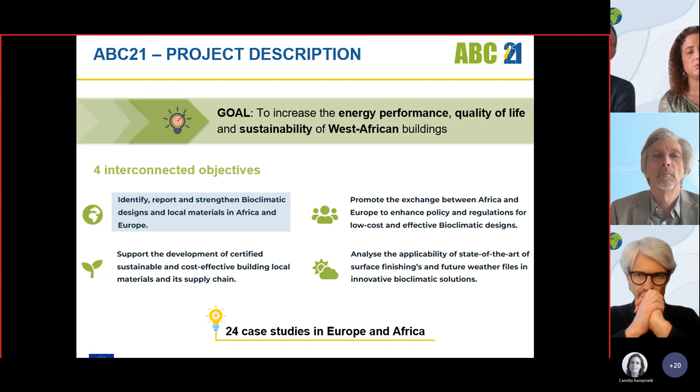To reach this objective, we have identified 24 case studies in Europe and Africa, including La Réunion, which is a remote French island in the Indian Ocean on the east coast of the big island of Madagascar that you all know.

So all these case studies have been selected. First of all, we wanted to prove to public and private sector and also to policymakers that bioclimatic buildings can be comfortable and affordable. Most of the time, people think that bioclimatic buildings cost more money than a standard building, and we try with this project to prove that this is not the case.

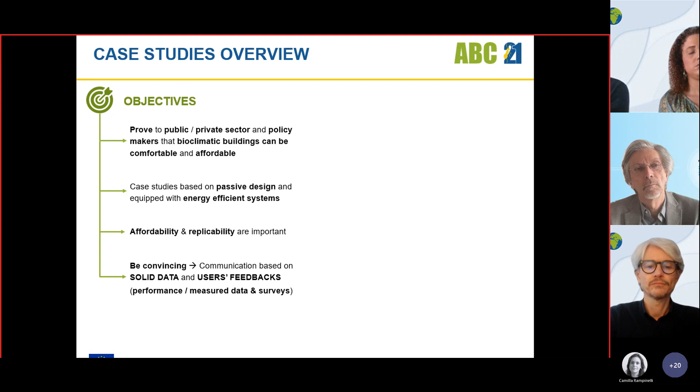The case studies have been identified thanks to their passive strategies, and they must have energy efficient systems as well. Affordability and replicability are two important criteria, and we have to have solid data and users' feedback to be convincing. We have to prove that those buildings are bioclimatic, comfortable, and that the users are happy to live and work in this kind of buildings. That means we need measured data and surveys to get this feedback.

In terms of location, we have selected 5 case studies in Europe, 13 in Africa, and 6 in the island of La Réunion. What we realized is that when we looked for case studies in Africa, there is a lack of data there. So in terms of improvement and gain in this project, thanks to this project, we will be able to have feedback and measured data in most of the African case studies that we have selected. That means we have launched measurement campaigns that started a few months ago.

So in terms of thermal comfort - just a few words, because the main purpose of this webinar is to analyze these buildings in terms of bioclimatic design, but also thermal comfort conditions. Thermal comfort is defined as that condition of mind which expresses satisfaction with the thermal environment.

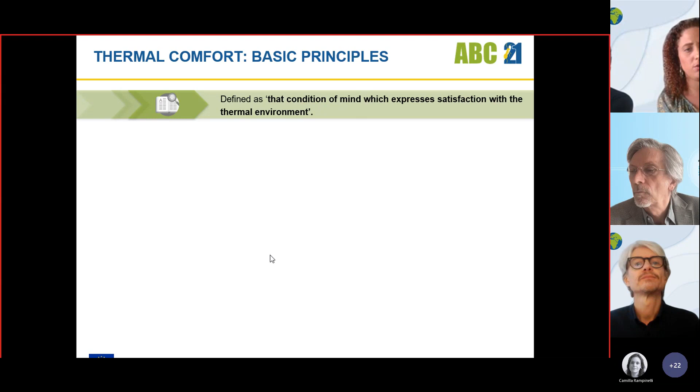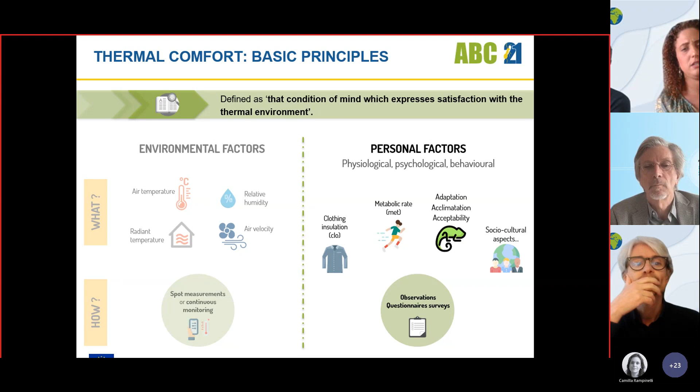Comfort is generally based on different environmental factors, such as air temperature, radiant temperature, relative humidity, and air velocity, which we can measure thanks to spot measurements or continuous monitoring. But thermal comfort is also based on personal factors that can be physiological, psychological, or other aspects. The most important are clothing insulation and metabolic rate, but there are also phenomena that have been studied, like adaptation and acceptability. These aspects are generally studied thanks to questionnaire surveys.

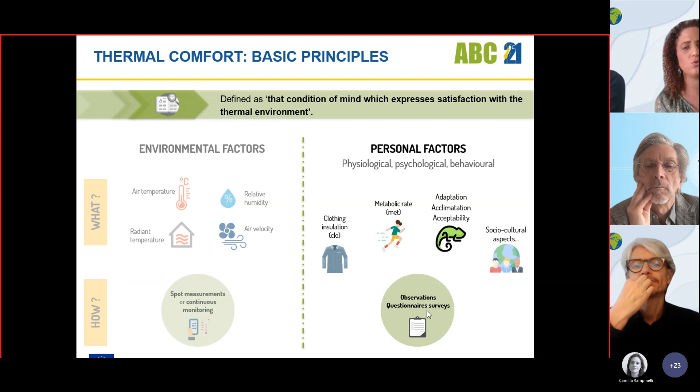So to reach thermal comfort in hot climates, air velocity is very important. In terms of natural ventilation, in all the buildings in Europe and all over the world, we can identify 3 different kinds of ventilation. The first one is used in air-conditioned buildings, just for hygienic purposes, and so the level of air change rate per hour is just 1.

The second type of natural ventilation is used to evacuate the internal loads. In that case, we need to have 10 air changes per hour. And the one which is more important, if we want to create air velocity on the users, is the one delimited by this rectangle. The aim is to create an indoor air velocity of 1 meter per second on the users. In that case, we need a very high air change rate per hour.

60 is the minimum. In terms of thermal comfort, the comfort zone is the blue zone, and it's defined and can be influenced by the air velocity, which is on the x-axis of the diagram, and the air temperature. As you can see, the more important the air velocity on the user, the more you can feel comfortable at high temperature. For instance, with an air velocity of 1 meter per second, the user, if the clothing is appropriate, can feel comfortable up to temperatures like 30 degrees.

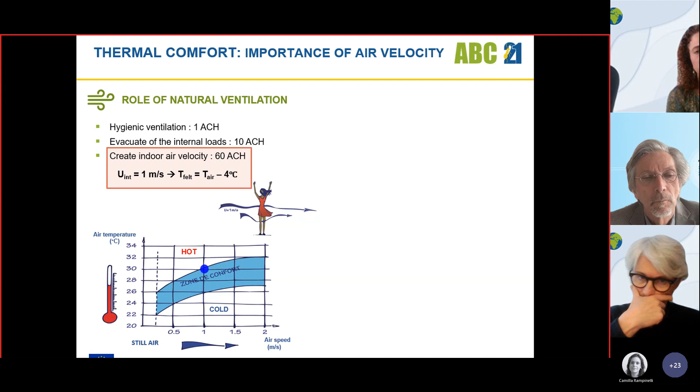This air velocity is generated by a difference of pressure between the two facades of the building. That means we need narrow buildings so that we can use natural cross ventilation.

In case we have no wind, ceiling fans have a crucial role because they can create air velocity, and the feeling temperature can be reduced by 4 degrees. For instance, if a user has an air velocity of 1 meter per second and the temperature is 30 degrees, the temperature the user feels is 30 minus 4, which is 26 degrees. So he can feel very comfortable.

So ceiling fans can play a very important role, and air conditioning can be replaced by ceiling fans.

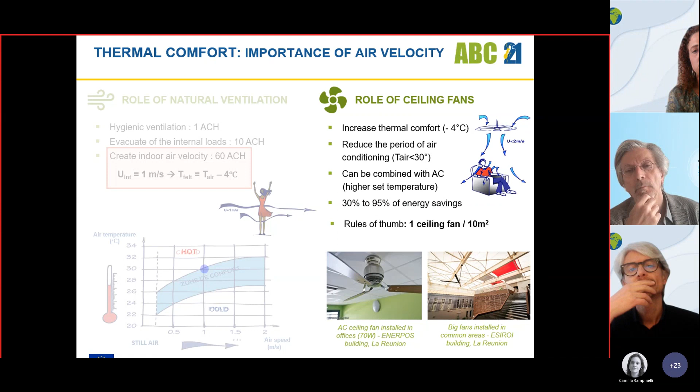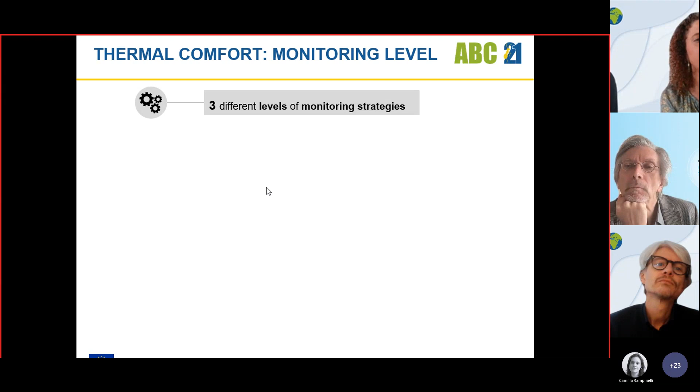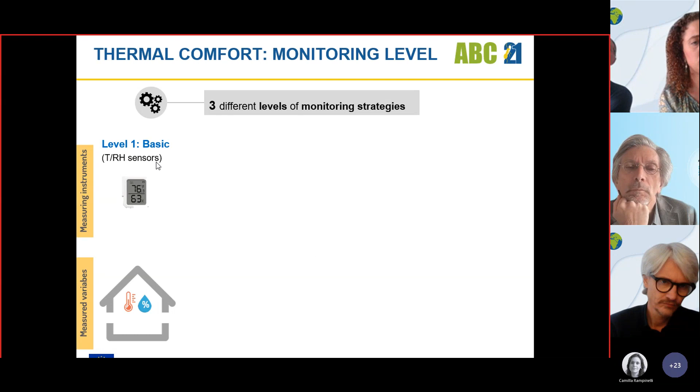So to measure and study thermal comfort in the different buildings, we define 3 different levels of monitoring. The first is a basic level, where we only put temperature and relative humidity sensors inside the room. Level 2 is the intermediate level.

We add a weather station outside. So inside the room we still have the smart sensors for temperature and relative humidity, and outside the building we install a weather station.

And the next level, the detailed level, is like the first 2 levels - we have air temperature inside and the weather station outside for the different physical variables - but we also have measurement of air velocity and globe temperature inside the building. So the inside monitoring is more detailed.

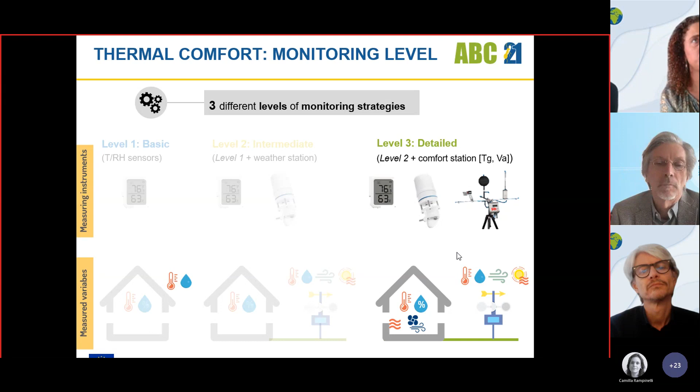Here we have the different levels for all the 24 case studies we have selected. Just to show you, we only have 4 buildings with the basic level, and for most of the buildings we tried to have the detailed level, especially for the African buildings, where most of them are in level 3, so we have detailed monitoring.

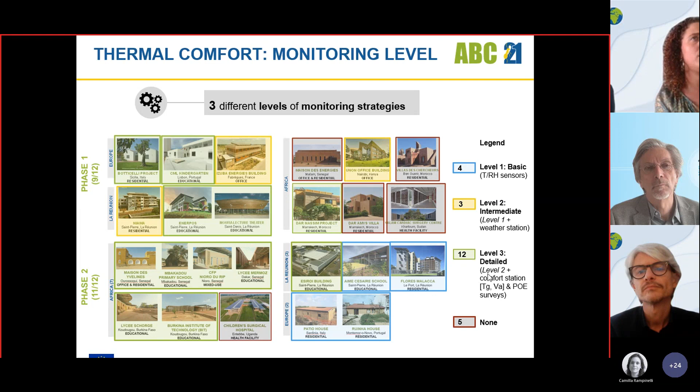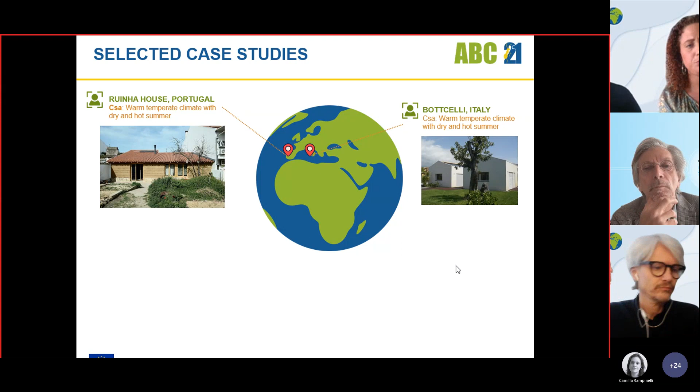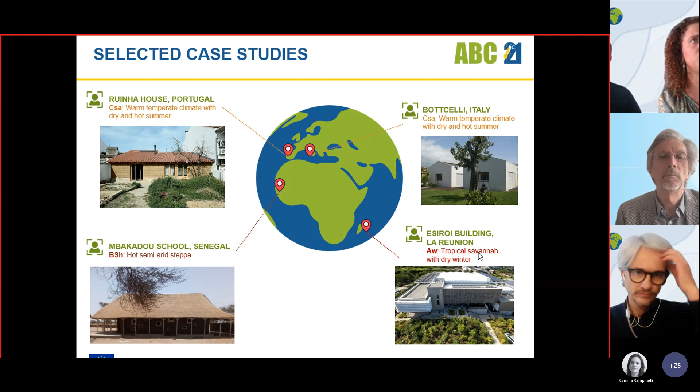So now we are going to focus this webinar on 4 case studies that we have selected. Alessio and Lorenzo are going to present the 2 case studies in Europe: the Ruinha house in Portugal and also Botticelli in Italy. Then I will follow with the Mbakadou School in Senegal. And finally François will present the Esiroi building in La Réunion. So now I leave the floor to Lorenzo and Alessio.

Thanks. So here is a presentation from Lorenzo Pagliano, Silvia Erba, who is also coordinating with me the entire project, and Alessio Battistella. The first case study is this single family house located in Sicily.

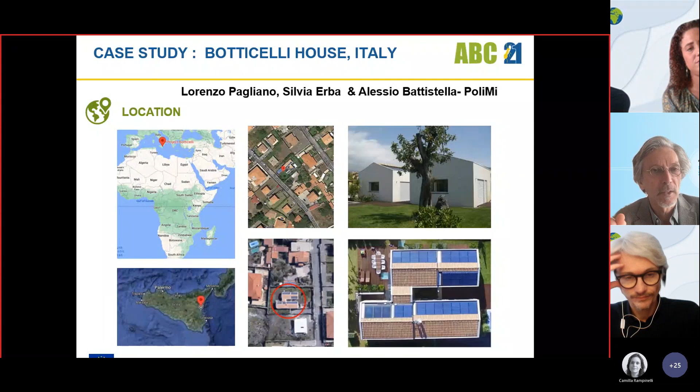The building has passive features, one of which is quite important: the external insulation of the envelope. This house is certified passive house and Casa Clima. It has 20 centimeters of external insulation, high performance windows, and other passive features like natural ventilation, especially at night during summer, and an earth-air exchanger where ventilation air is pre-cooled through the ground.

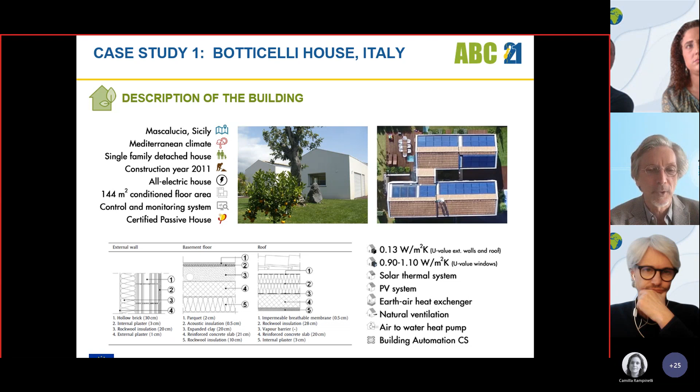Protection from solar radiation is given for the opaque walls by the external insulation and the thermal mass of the structure. There is also protection from direct radiation through automatic controls on external blinds, and the ground exchanger helps as well.

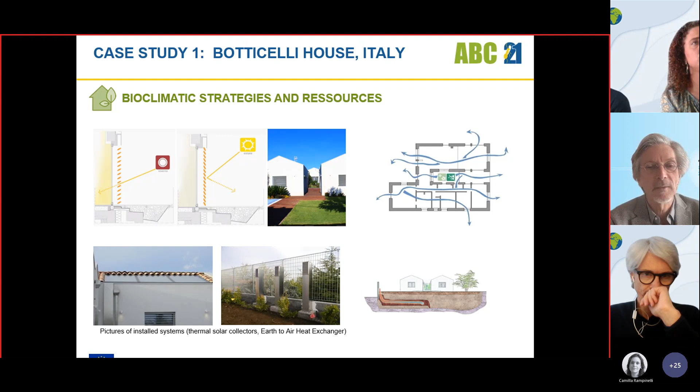We have a very detailed monitoring system here for air temperature, globe temperature, humidity, air velocity, indoor air quality, and also measurements of visual comfort, at least the luminance.

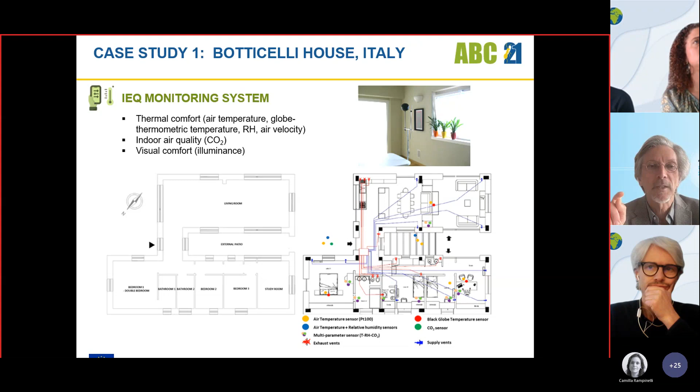In this building, since we have 3-4 years of monitoring, we also have complete monitoring of the energy uses for each equipment in the house, and the energy generated by the photovoltaic panels on the roof. Since energy use is so low thanks to the passive features, the building actually generates more energy over a year than it uses.

But if we look month by month, there is still an imbalance between what is generated on the roof in December and what is used in December. So it's not a net zero energy building. If we do the balance over a year, which isn't very realistic, it works out, but month by month it's close to zero because of the high reduction of energy use thanks to passive features.

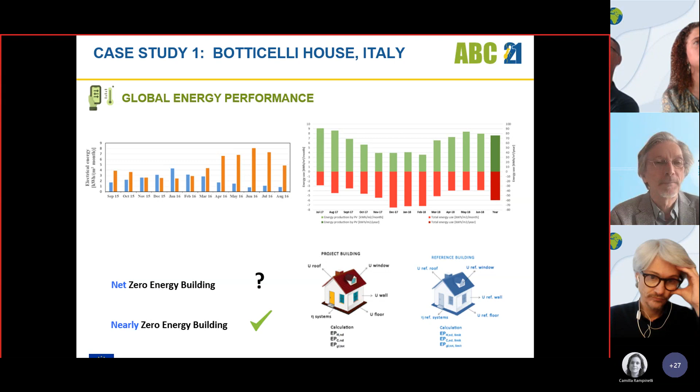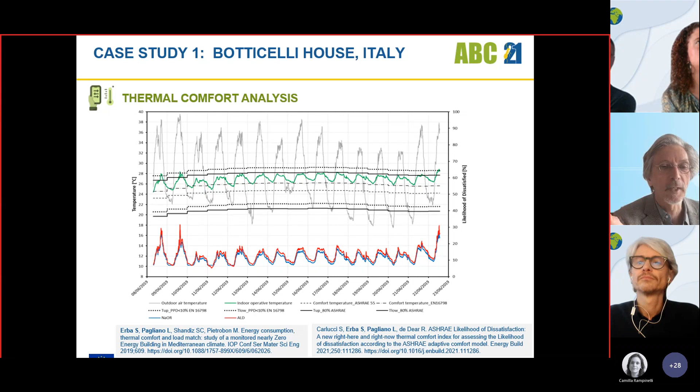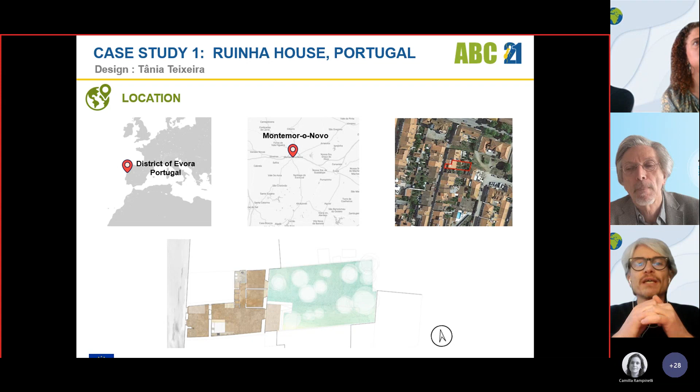In this case, we decided to present a case study located in a historical center, where the buildings form a kind of dense system. The idea is to understand how we can compare these kinds of materials while maintaining techniques that come from tradition.

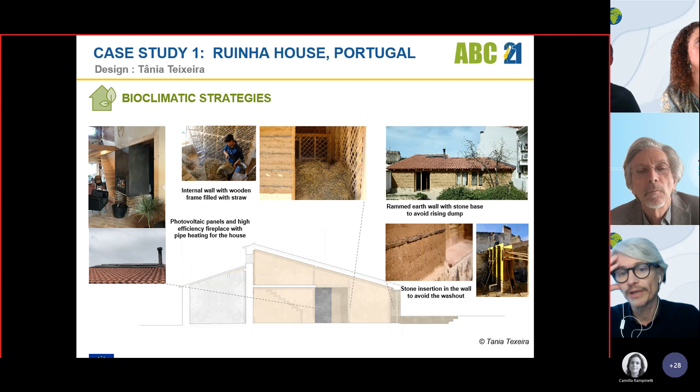We are about 40 minutes driving from Lisbon, quite near Évora. This house is made with rammed earth, using the pisé technique, which they pushed forward and maintained as the facade. There is no plastering, just to demonstrate that we can do it, with a little architectural solution such as layering stone that avoids the washout of the wall.

The internal walls were made with straw and earth. The straw is a waste product from agriculture, so there's a strong idea of circularity in this building, along with the photovoltaic system.

In winter, the photovoltaic system can give energy to a heating system, and when there is no sun, they use a kind of high-performance oven or chimney. There is no air conditioning, and with just thermal inertia, this very interesting solution manages to maintain a quite comfortable situation.

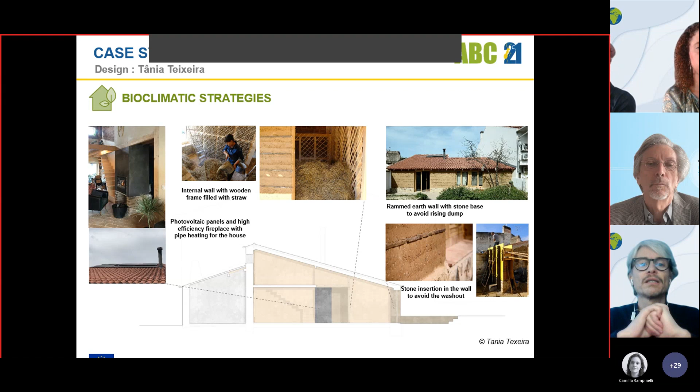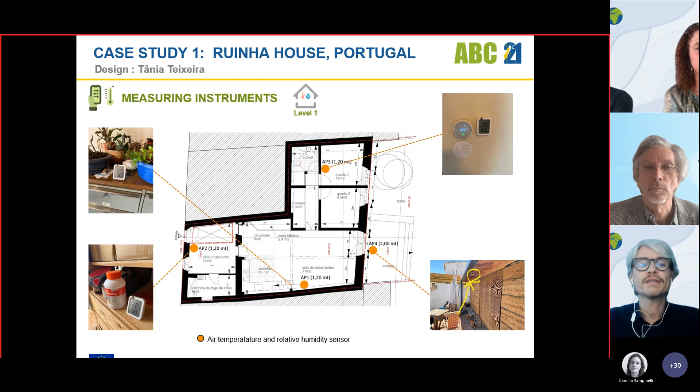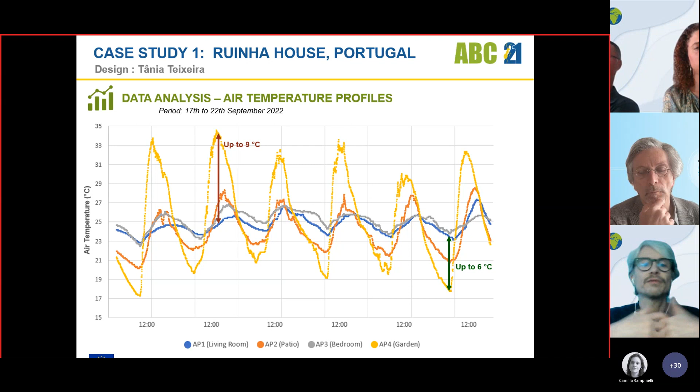Here you can see there is a quite interesting gap between external and internal, and night and day. So just with night ventilation, we can get quite interesting values again in terms of natural ventilation.

I leave the floor to Virginie. Thank you, Alessio. So now I'm going to present the Mbakadu School in Senegal, which was designed by ASF Italia.

The building is located in the region of Louga in Senegal. We can see on the picture that there are only some shrubs and not a lot of buildings. The Mbakadu School is composed of 3 buildings. The first one was built before the project, in cement. For the 2 other buildings, I'm going to present the bioclimatic principles.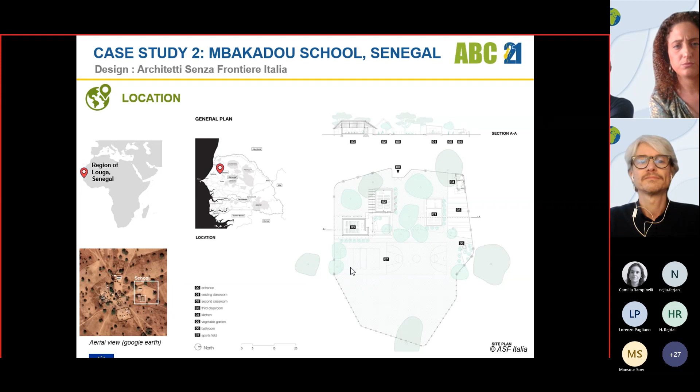Here we have the different bioclimatic strategies implemented in this building. The asset of the building and the strong points we can retain is that they worked on the high thermal mass of the walls and roof, thought about solar shading with large roof overhangs, and used local materials.

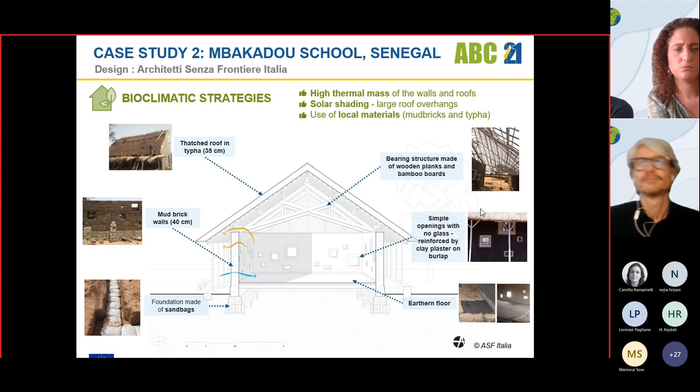You can see that the foundations of the building were made with sandbags. The walls are made of mud bricks that are really thick, 40 centimeters. The roof is a traditional thatched roof in typha, also very thick, at 35 centimeters. All the structure of the roof is made of wood and local bamboo. Also, the particularity of this building is that it has simple small openings with no glass, and the floor is made of earth.

For these buildings, we are at level 2 of the monitoring strategy. Here we can see the position of the temperature and relative humidity sensors in the different buildings. The sensors meter 1 and meter 2 are placed in the buildings described before, in mud brick and typha, and the third one was in the building made of cement. We can also see the position of the local weather station that the team on site installed for the project, which comes from the TAHMO project.

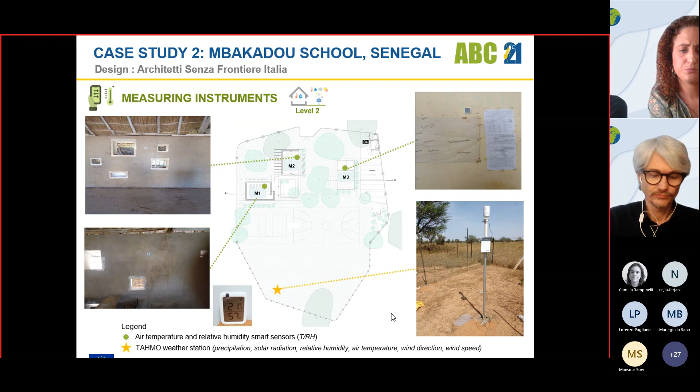Here we have an analysis of the data exported from the temperature and relative humidity sensors in terms of the Givoni comfort zone. We focused only on meter 1, since the 2 classrooms had approximately the same results. In the Givoni diagram, comparing the results for temperature and relative humidity inside and outside, we see there is less dispersion of the points inside the building.

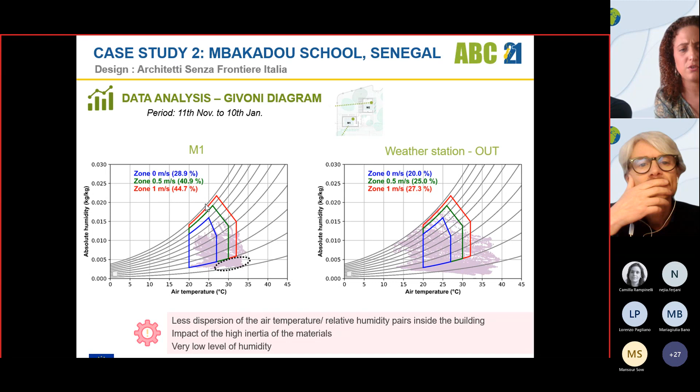Here we can see the impact of the high inertia of the materials. Also, most of the time the points are outside the comfort zones, but that's because of the low level of humidity. For these conditions, if we can achieve an air velocity inside of 1 meter per second, we will have only 45% of the points in the comfort zones.

We then tried to analyze the data in terms of air temperature profiles for a representative week in summer, where global radiation all days was superior to 800 watts per square meter. The most important thing highlighted here is that we can have a difference of almost 5 degrees between interior and exterior during the day, at the outside maximum. Also, the diurnal air temperature variation is really different inside and outside.

Inside, we only have a difference of 8 degrees between night and day, between the lowest and highest points, while outside we can reach 18 degrees Celsius of difference between the lowest and highest air temperature. Also, we saw there is no thermal lag, which confirms the impact of the high inertia of the materials.

Finally, what we can also see is that the temperature is highest from 12 o'clock to 7 p.m. in the evening, and that the temperature is lowest from the beginning of the day, from 2 a.m. to 9 a.m.

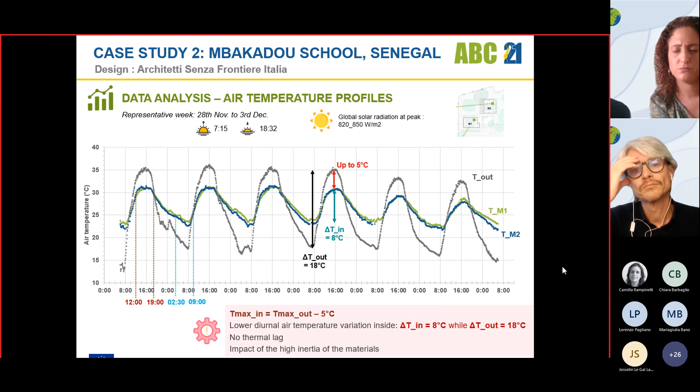Also, we try to analyze the data in terms of wind profile and wind potential for these buildings. What we can see is that the mean wind speed during occupation hours, from 8 to 6 o'clock, is almost 2.3 meters per second.

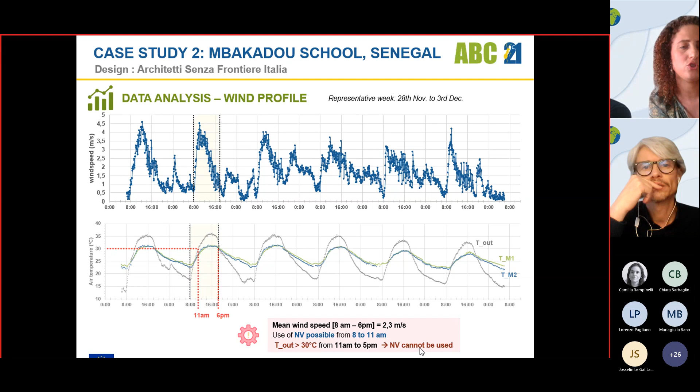We can use natural ventilation from 8 to 11 a.m. because the temperature is lower than 30 degrees. But then we saw that there is high potential in terms of wind during the time when temperatures are very high, more than 30 degrees. So normally we cannot use natural ventilation then, because we will have hot air in the building.

So what we learned from these first results, and what we can recommend, is that we can use the wind from the outside to improve the air velocity inside when the air temperature outside is below 30 degrees. But when the temperature outside is more than 30 degrees, the idea is to minimize the use of the openings, only for hygienic purposes.

But then to use the ceiling fans, and maybe the evaporative cooling, to help decrease the air temperature of the room.

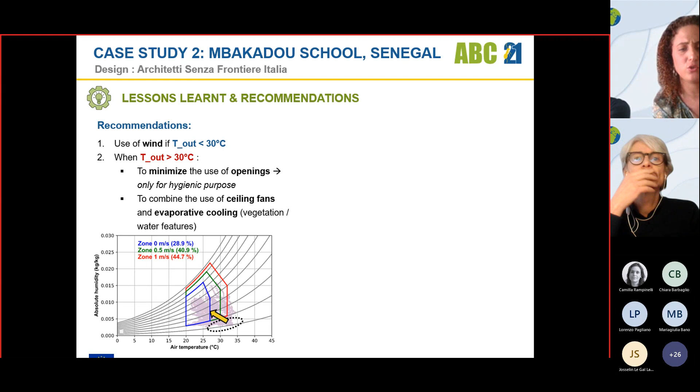The different solutions that can be considered: to collect water from the air during the night, because during the night the air temperature is very low, and it could be possible to have condensation on a corrugated iron sheet. Or we can use systems like fog collectors when there is fog, or as they've done before in other case studies not presented here, in Senegal they dig a well to collect the water and then reuse it in an evaporative cooling system.

And the way to proceed, as step 2, the idea is to use a water mist spray system during the day to help decrease the air temperature.

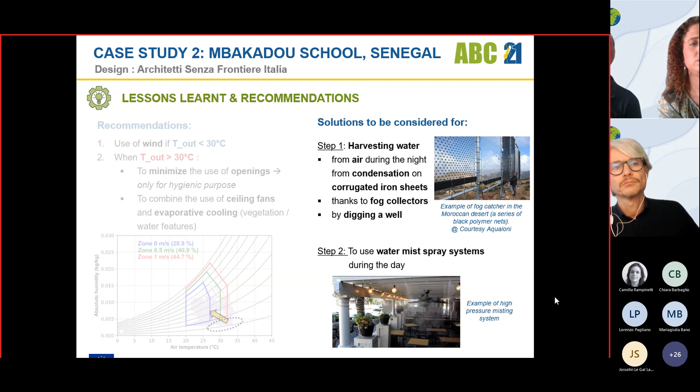Thank you, Virginie. Now we move to La Réunion. So we leave Senegal and we move to La Réunion, a small French island located in the Indian Ocean.

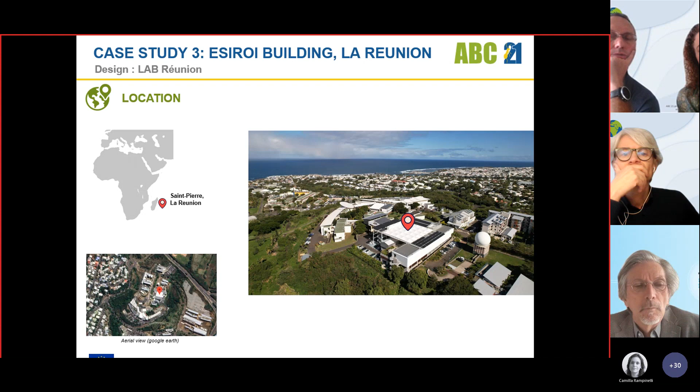You have an aerial view of the building, the Faculty of Engineering in Réunion. We can move to the next slide.

Yeah, so this is the first time that we use the wind to design a building. The architecture of this building has been clearly influenced by the wind. What we did during the design stage was give the design team all the data collected thanks to a local weather station we have on site, so the design team had lots of data, 10 years of data from the past decade.

We asked them to analyze those climatic data. During the opening hours of the building, what was important was the main direction of the wind during the daytime and during the hottest months. It appeared that the main direction of the wind, the trade winds, were mainly east and southeast.

That's why the architect had the idea, in terms of shape, to create a C shape. In the plan view of the building, you can see that the architecture has the form of a C, and the C faces the trade winds.

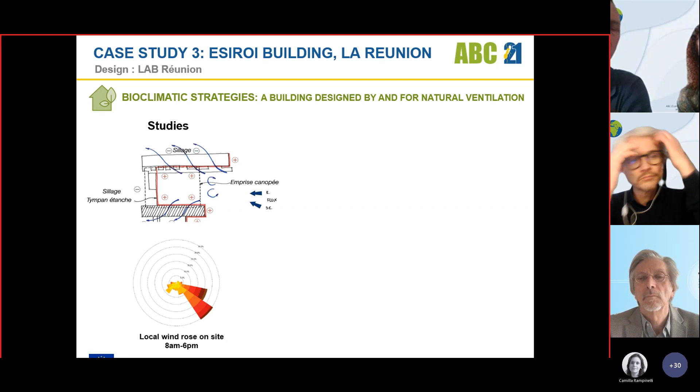To validate this, we asked the design team to create a model of the building, and the model at the design stage was tested in Paris at the Eiffel laboratory, just to confirm that the architectural solution performs well. It appeared that the natural ventilation worked well, thanks to the wind tunnel tests that were made in Paris.

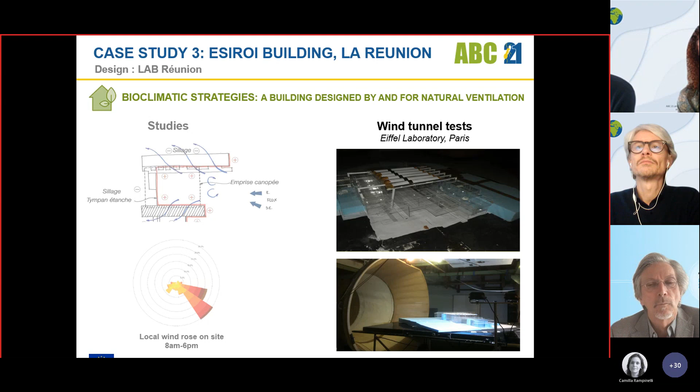So in terms of bioclimatic strategies, except the one about natural cross ventilation that I've already explained, the main features are: all spaces are naturally cross ventilated, and we use low inertia materials.

We use a material called Danpalon, which is polycarbonate that is very thin, only 16 millimeters, and it allows natural light to enter the building. We also use solar shading systems, and we asked the design team to put the solar shading system detached from the openings so that we can use natural daylight.

Vegetation was mandatory around the building. Vegetation and trees can reduce the air temperature by 4 degrees compared to a building that has just mineral pavements.

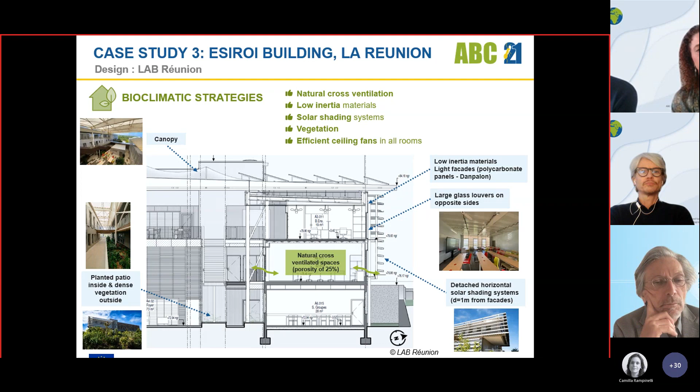And then in terms of energy efficient systems, ceiling fans were installed in all rooms. In case we could not use natural cross ventilation, we use a low pressure shaft, because we had some spaces where the pressure was exactly the same on both sides. Few buildings have been designed like this all over the world with low pressure shafts.

The idea is to create a shaft, and thanks to the Bernoulli effect, to create a low pressure. It's like a chimney, and thanks to this chimney, we have a low pressure. The air velocity works so that the wind comes from the high pressure facade.

And as you can see on the picture, the blue arrows show the path of the air velocity inside the building. And as you can see in the pictures of the low pressure shaft, underneath the chimney we could plant some plants. So in terms of visual effect, it's a very pleasant atmosphere for the users.

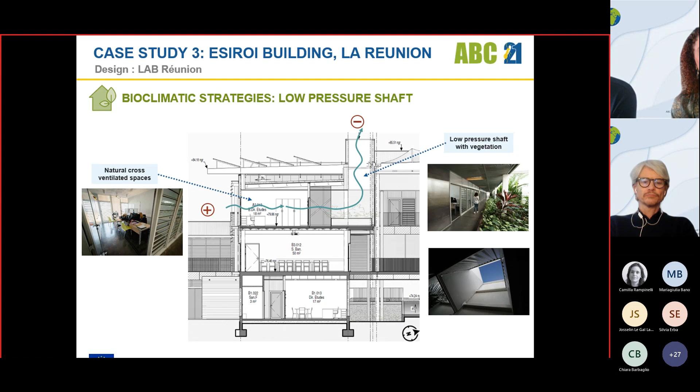Here we have a typical office. Instead of having just one person per office, the size of offices are 6 meters deep and 3 meters wide, and for each office we have 2 people.

In terms of passive design for the desks, we worked with the architect on the indoor design, so the desks are parallel to the airflow. We use vertical louvers so that the users can adjust the air velocity.

The Danpalon is used for natural light. Even the seats had a specific design - the back of the seats have a mesh, so that when the user is seated, they can exchange air and avoid sweating.

One very specific detail which is very important: when you have lots of air movement inside the offices, there's a risk of doors closing due to the air movements. So we asked the architect to install a magnetic door stopper to avoid the door closing due to air movements.

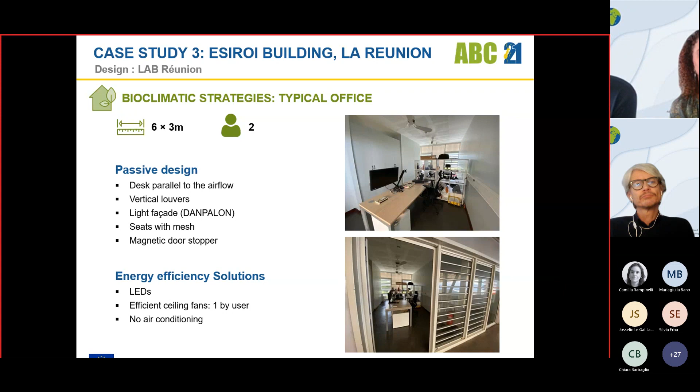So I leave the floor to Virginie to explain the monitoring results for this building. Okay.

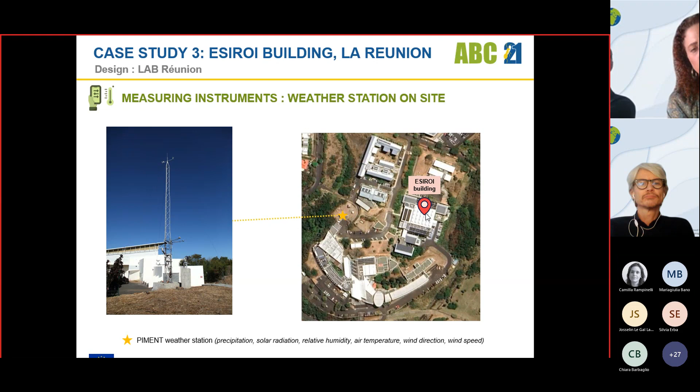So for this building, we are at level 3, the detailed monitoring level, and we have a weather station on site that is very close to the studied building. Also here you can see the ground floor and first floor plans of the building, where we installed some sensors.

On the ground floor, 2 classrooms were monitored in terms of air temperature and relative humidity, thanks to smart sensors. But we also did spot measurements with the testo comfort station in the different classrooms on the ground floor. And on the first floor, we have 2 offices that have been monitored on different facades, and also another classroom on the first floor.

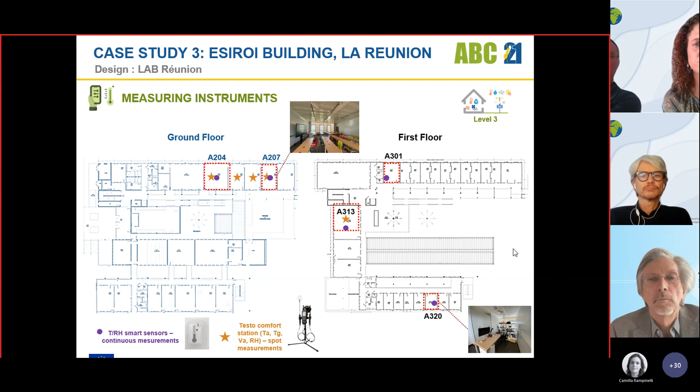So here you have the results in terms of Givoni comfort zone for 1 year, from March 2022 to March 2023, in different types of rooms, and also for the outdoor condition.

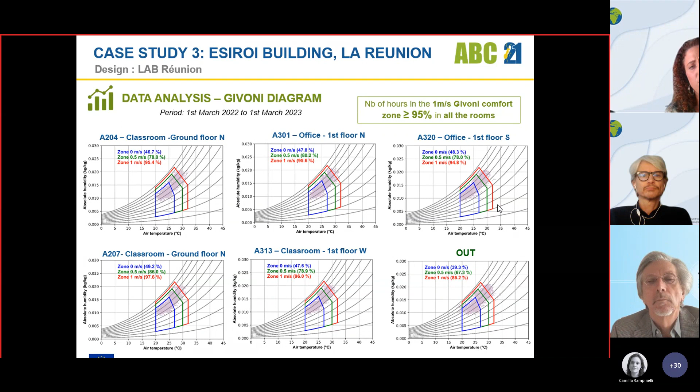And what we can see here with this diagram is that the number of hours in the 1 meter per second comfort zone is superior to 95% in all the rooms. So it could be possible to achieve comfort conditions inside the rooms if we have 1 meter per second airflow.

So then we tried to select 1 week and see the results in terms of profiles. First, we have here the representation of solar radiation and the wind profile for the selected week. And here you can see that the first 4 days are almost representative of the days we typically have in Saint-Pierre during the summer, with sunny mornings and mostly cloudy conditions during the afternoon. Then we have 3 sunny days at the end.

We have different categories of wind. During most of the first days, the wind speed was lower, with a mean wind speed around 1.7 meters per second, while during the 3 last days, with sunny conditions, we also have higher wind speed, with a mean wind speed around 5 meters per second.

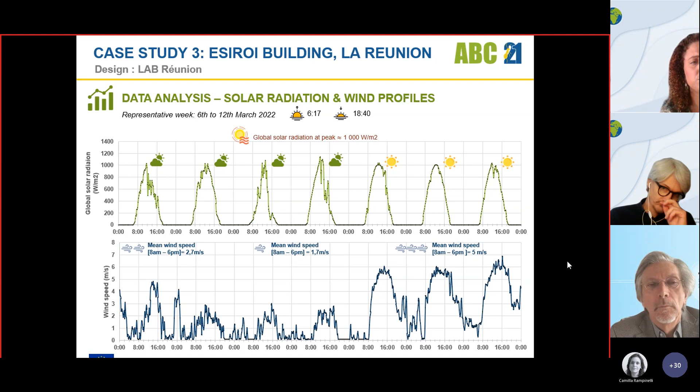And so here we have the air temperature profiles for some selected rooms of the buildings, and also the air temperature outside the building. So what we can see here is that during the first days, where we have lower wind speed, the air temperature inside could be equal in some conditions, but it's generally below the outside condition.

Also, when we have higher wind speed, this difference for the maximum temperature inside and outside is more pronounced. We can have a difference of 1.5 to 2 degrees from the inside compared to the outside. And we can see that the temperature variation inside the building is lower than outside, because inside we only have a difference of about 2 degrees between the lowest and highest air temperature, while outside the variation is higher, around 6 degrees.

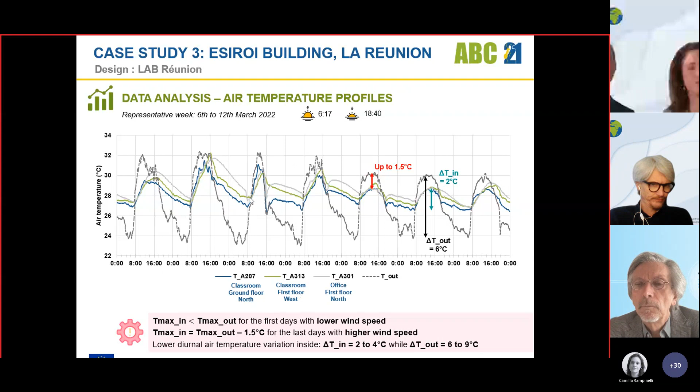So then we move to the post-occupancy evaluation, the results from the questionnaire, with two different days. The first day was the 14th of February. In February, in La Réunion, as we are in the southern hemisphere, February is one of the hottest months of the year. So we interviewed people at the beginning of the class and at the end of the class.

They were asked in terms of thermal sensation, meaning they had to reply whether they felt very cold to very hot. And they were asked about their thermal judgment, which is more like, how do you feel? Do you feel this environment comfortable? The scale varies from comfortable to very uncomfortable.

So in terms of thermal sensation, at the beginning of the class, 2 students felt neutral, neither cold nor hot. So for us, the most important thing is that the majority answer neutral or slightly hot. If this is the case, that means the comfort is achieved. And in terms of thermal judgment, the goal is to have a scale between comfortable and slightly uncomfortable.

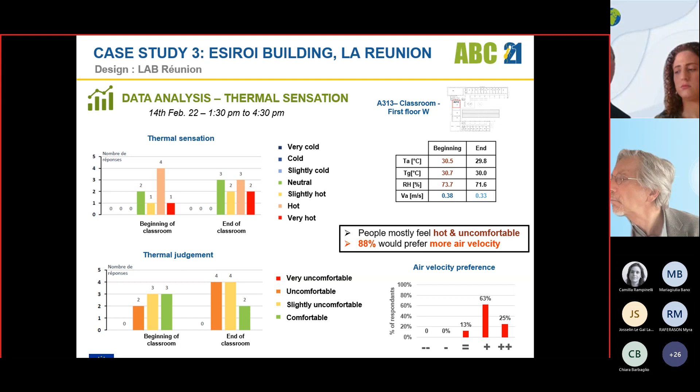Some people felt comfortable and slightly uncomfortable. The majority felt comfortable and slightly uncomfortable. Only 2 people at the beginning and 4 at the end felt this environment uncomfortable.

So just to explain why we had these results - we realized that the ceiling fans were not working. We had a problem with the ceiling fans. This is why in this condition, the users were not able to use ceiling fans to balance the effect of the low velocity.

It was not a very windy day, and you can see that the answers of the users are really affected by whether the ceiling fans operate well or not. This is why later in the presentation I will insist on the role of the ceiling fans, because without them, when there's no wind, the users cannot control the environment properly.

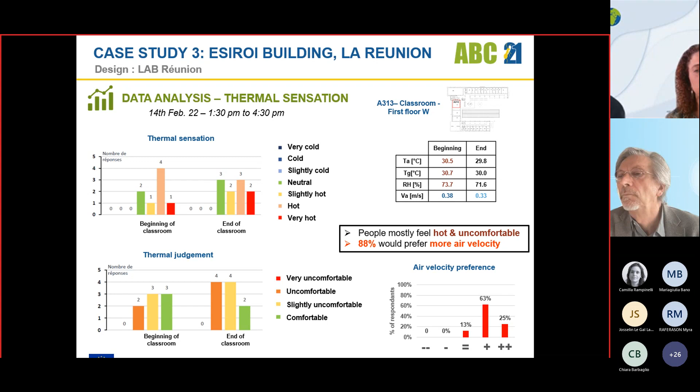So in terms of lessons learned in this building, thanks to the surveys, I can state that users are overall satisfied with the thermal comfort conditions in summer. We realized that, as in Réunion, we have two very different seasons - a cold season, and people complain more about conditions in winter because the wind is really strong and really cold. We didn't plan for users to answer that way, but we really have to face a problem of discomfort in winter, not in summer. So we have to find solutions to manage the wind in winter.

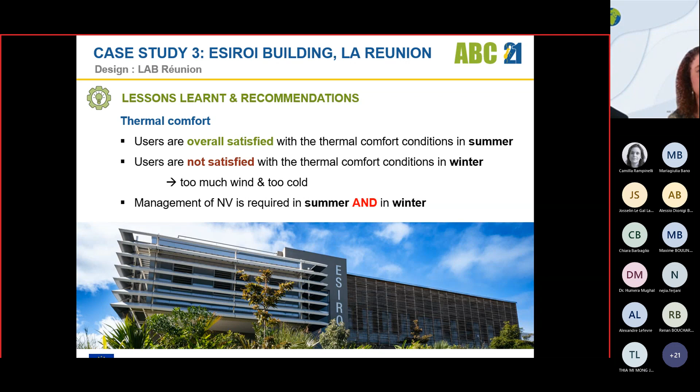And to conclude this webinar, to summarize what was explained by Lorenzo, Alessio, and Virginie, here are some common recommendations. We don't present all 24 case studies, but with the experience of those 4 case studies, we can state that vegetation, planting trees around buildings, is very important. As I said, it can reduce the air temperature by 4 degrees.

Natural cross ventilation is a very interesting option, but we must find a way to manage it. We realize that, for instance, for the Mbakadu case study, natural ventilation can be used when the temperature outside is below 30 degrees. When the temperature is above 30 degrees, it's better to close windows or reduce openings and use ceiling fans, because when the air outside is too hot, we have to stop it from coming in.

All those buildings that were presented have efficient solar shadings that are used in summer. Ceiling fans must be a solution, a mandatory solution imposed in all bioclimatic buildings in Africa, in Réunion, and in the south of Europe. Ceiling fans are really, really important. I insist on this.